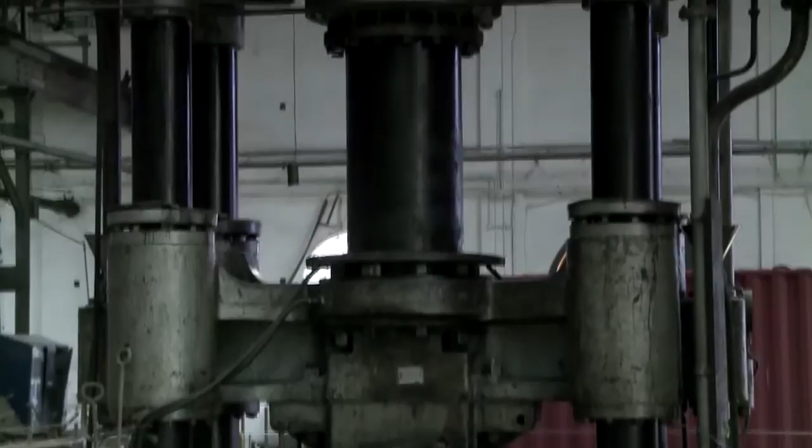In this workshop particularly, we have a machine nearby called the Davy Press. It used to have 2 steam locomotive boilers to service and raise steam to drive the huge 1,500 tonne Davy Press. When we cut off billets of steel, we'll pan in on some of the ingots a little later.

In this section we have an overhead crane because we're limited to 5 tonnes weight for the billet or ingot of steel we can lift. It would take maybe up to 4 to 5 hours to heat this billet of steel up to bring it out to forging temperature.

The forger was a highly paid man because that piece of steel, maybe in today's value $5,000 or $6,000, that ingot of steel - if the furnaceman or the forger overheat it, you've destroyed the piece of steel, straight away it's ruined.

You had to have a team of about 6 people. There was an overhead crane in this section, and a chap by the name of Ted Bocott used to be the driver of the crane in the 1950s, 1960s era.

The forgers were Bill Lawrence and Harry Lawrence. They were quite characters to watch on the floor. It was like running a circus show, and you had to get a giggle out of it. But where the forger spoke, everyone jumped to attention. If the job was hot, he'd say, 'righto, off your backsides, let's get out of the job.'

So then you would have to affix a thing called a porter bar to manipulate the piece of steel that you're going to put under the press. The forging range may be 1300 degrees centigrade, which is yellow-white temperature. Mild steel melts about 1400 degrees centigrade, just above that temperature line. But you may have been forging different types of steel.

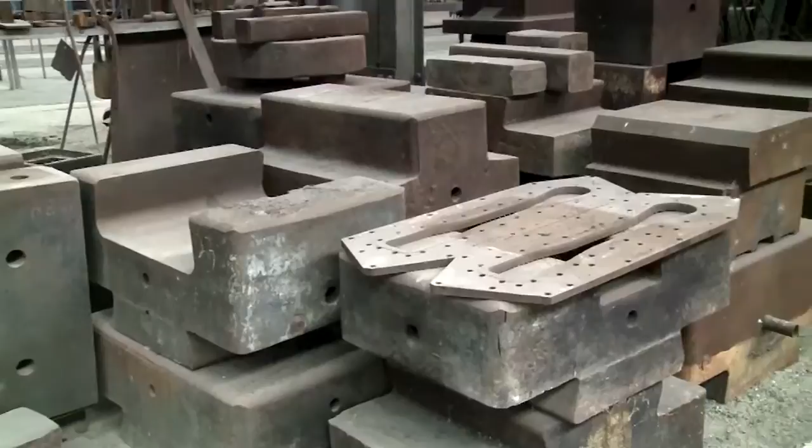The Davy Press is just to the rear of us, but to use a Davy Press you have to have heavy die blocks. We can see numerous die blocks sitting here. They're very costly because they have special steels in them - molybdenum, chromium and nickel - because when you forge a piece of material, it has to be harder than what you're forging.

So there are numerous die blocks here. I dare say a pair of die blocks, you're probably looking at in the order these days of $10,000 for a set of die blocks. They do fit into the press itself. Well, now we've just moved away from the die blocks to all the tools that we used to use underneath the Davy Press.

Although they look all weird and wonderful, colourful in their shape, each served a purpose. We can see laying on the ground a hook, a simple, very small draw hook off a locomotive, a typical thing forged at this machine. But all the tools were very, very heavy.

I was only about a 20-year-old apprentice when I had to work here for about six weeks in the late 1950s, and just to pick one of these tools up, the weight was enormous. There's spanners laying around the workshop that I think weigh over 20 kilograms just for one. So it was a lot of brawn and hard work. The forgers generally were pretty big, pretty strong people to do the work they had to do.

As I said earlier, we're standing near the table and chairs where the men used to sit and wait, and the crane man, till the job was hot. The furnaceman would yell out that we're up to temperature, and then the crane driver would remove the item from the furnace and go underneath the die blocks at the press. The work was very heavy and very hot, but we survived it.

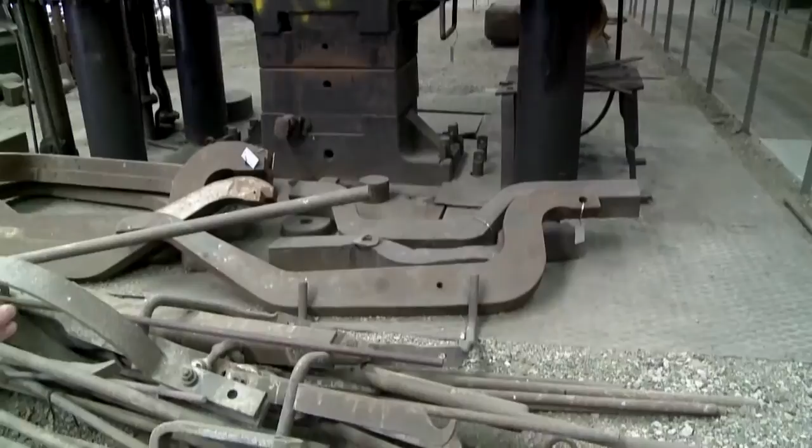We're standing near the Davy Press itself, and on the ground in the foreground we see a few different items. At the base of the machine there are some funny twisted shaped pieces of steel - equalising beams off mainline diesel locomotives. If you can visualise where that curls around here, there's a wheel in there, and another wheel there. Those two go together.

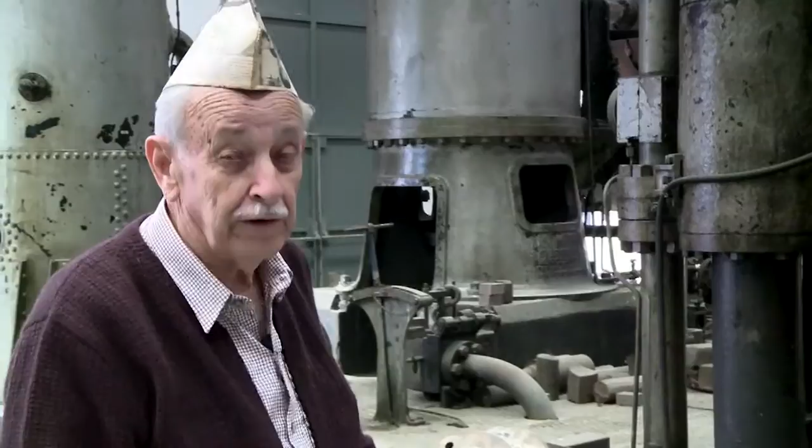The finished items are probably very, very valuable - maybe $12,000 each. You look at a piece of steel and it just looks like a humble piece of material, but in real value, it is very, very valuable.

Also in the area we have some of the porter bars which we use for manipulating our materials underneath the Davy press. I mentioned earlier, you heat the material up and you've got a forging range. All materials have a forging range, and if you go beneath it you can start to destroy the grain structure of the material. So there's a lot to it, a lot to do with metallurgy.

I did mention this building earlier - maybe we could show the twin cast iron columns which hold the roof up. They're made of cast iron, basically 4.5% carbon content. The major framework in the roof is wrought iron, which is nearly pure iron, maybe only 0.03% carbon. The die blocks still have a bit of carbon in them, but we also use fancy materials like cobalt, chromium or nickel that stand up to heat, and a lot of pressure. Remember, the press squeezes, so if you had rubber steel there it'd be completely distorted. We want something to retain its shape even under heat and extreme pressure.

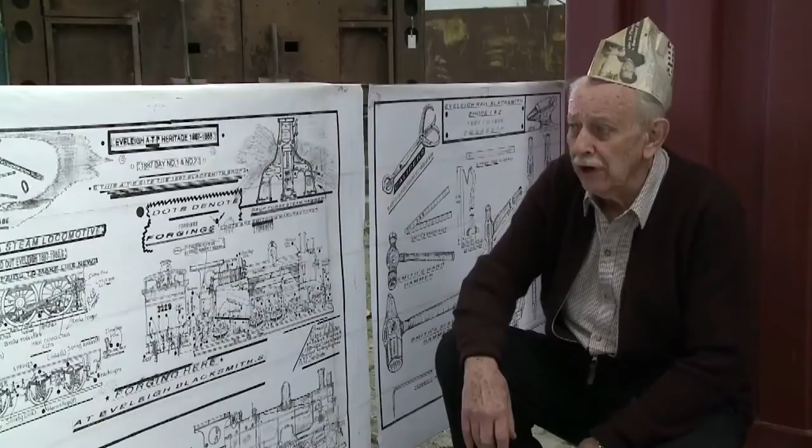I've done some drawings over a period of time since I've been helping out as a tour guide here with the Australian Technology Park. We see here basically the format of a steam locomotive. What it simply means - 32 was a 32 class locomotive, and they built a fair few here at Eveleigh. 29 happens to be the 29th one built.

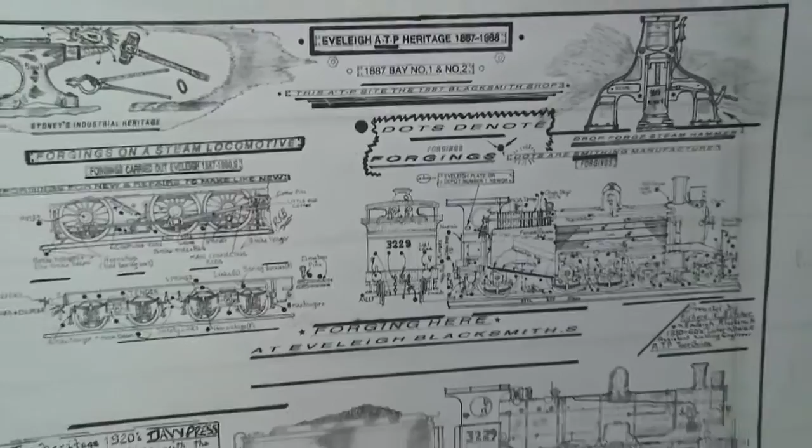Being a blacksmith and forge shop, these little black dots indicate what blacksmiths used to forge up there - the draw gear, the hooks and the chains, things for the grate of a locomotive, the eccentric arms, the connecting rods which are in the lower drawing. We did use the Davy press for a lot of this work.

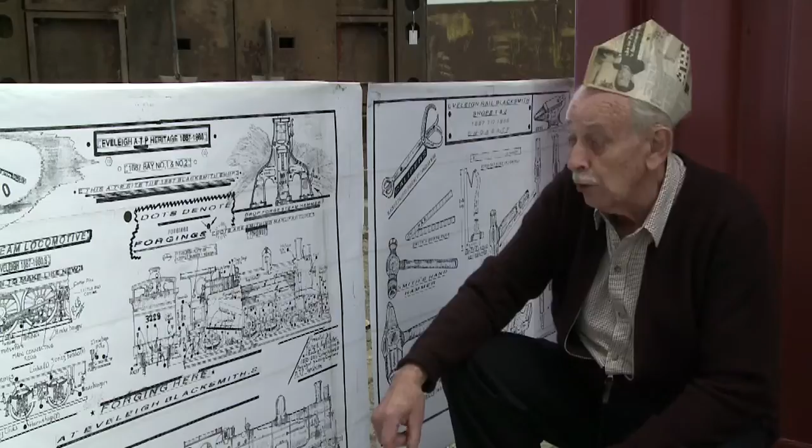There were also steam hammers in this workshop when I worked here. Also at the other end of this workshop we have a heavier forging press, and that came from the very first workshop here, which went back to the Cleveland paddocks. In the early days, of course, Redfern Station was called Eveleigh Railway Station, but Eveleigh, as was stated before, was a big employer.

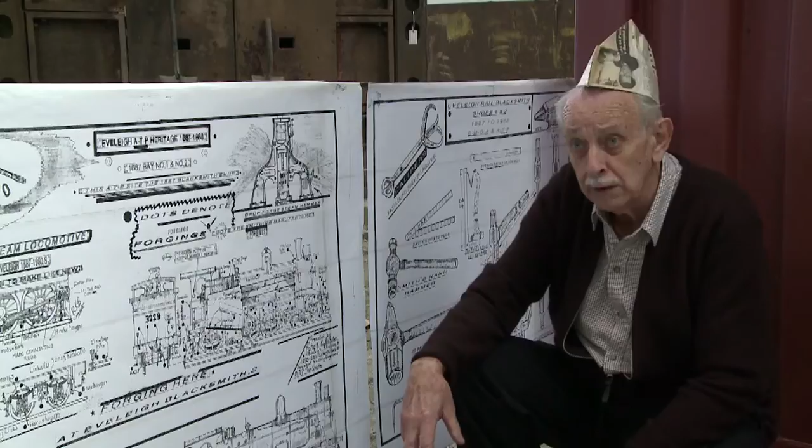I have read at one stage it got well over 7,000 people worked here, a big organisation, so close to the city of Sydney too. I did some sketches with little dots to indicate what was forged, and we had to keep 1,200 locomotives steaming on the rails. We did a little bit of carriage work here, although carriage works is on the opposite side of the tracks at Eveleigh, but brand new locomotives were also constructed on the site.

We're still in Bay 1 where the Davy press is. The blacksmith shops traditionally, you couldn't work on tarred surfaces because you're always forging hot material. If you lay the hot forging on a tarred surface, it's going to catch fire. You certainly couldn't have wood because you'd burn the building down. Cement, if you lay something hot on it, literally explodes - it fragments and blows up. So the floors in these workshops were basically dirt floors, very fundamental floors.

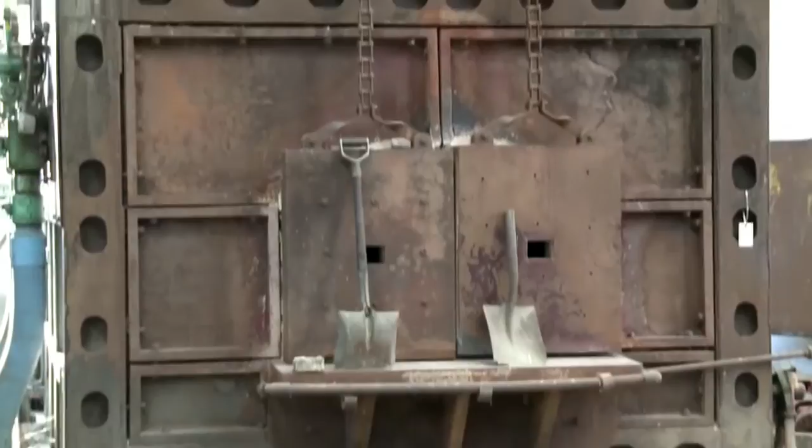In the background we have a furnace. Years later, furnaces were installed for heating up our larger pieces of material. Most of the furnaces were oil fired, but oil is carbonaceous and cooks more carbon into the material, which is very critical for what we forge. So it was good in one way and bad in another. Natural gas would have been better, but the workshops opened in 1887 and closed in 1988. If natural gas had been available, it would have been more inert to heat a piece of steel, but oil firing would impregnate additional carbon into the material.

We've now moved into Bay 2, which is principally there for the blacksmithing trade. In one section we had the toolsmiths, where they forged specialised tools, lathe tools, milling machine tools, and this type of thing. And we had more of the traditional repair work going on here.

I think there's only about 4 steam hammers in here today, but when I worked here there must have been maybe 12. A steam hammer is a very, very fast machine - very dangerous. It takes 2 years to train a young person or an older person how to operate one, because the piston goes up and down all the time, very quickly. If you blink, you could lose your life. They're very dangerous machines.

I only ever saw one person hurt when I worked here - he ended up 3 weeks in Missenden Road Hospital when tongs came off the job. We'll pan in a little while later and have a look at some of the tongs we used to manipulate our work with. There were around 56 men who worked here, predominantly blacksmiths, along with the blacksmith strikers.

Being a steam workshop, we were just having a look at the steam hammer. When the shop was activated in the morning, there were 4 big boilers on the outside. If we look skyward, we see a pipe with an expansion joint in it. When the chap would open up the main control valves in the morning, the whole workshop would kind of become alive. The air in here was smoky - sunlight used to filter through, and in it there were little sparkling, glistening pieces of coke and coal floating around. I'm still alive, so it never hurt me, but that was the way, and the aroma was beautiful from the burning coal. It was a very interesting place to work.

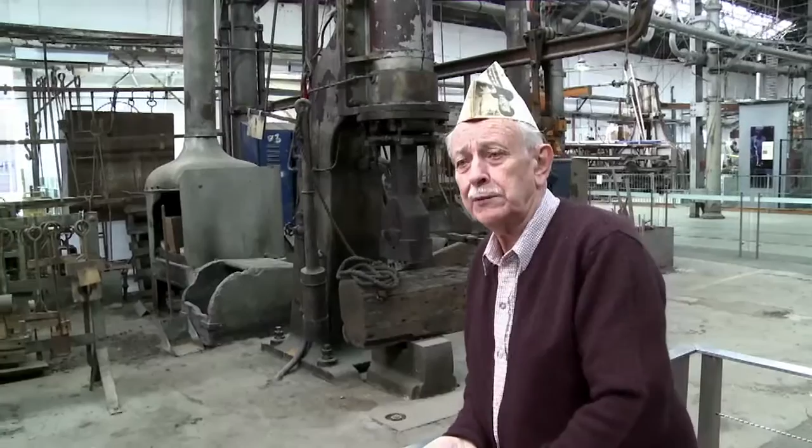We're still inside the blacksmith shop, and we see anvils - an essential item used in the blacksmith shop. The ones here are very heavy, 500 and 600 weight. 100 weight is 112 pounds, so I don't know what that is in kilos, but it'd be very expensive to buy one today. They're getting very, very rare.

And we also see the forge fire, which has a chimney that goes through to the roof outside. The basic fuel we used was coke. We'd light the fire up of a morning using a bit of kindling wood, or maybe some kerosene with a few pieces of timber covered in kerosene to light the fire. Then we'd bring the fire up to temperature, and then go on to coke.

You can't use coal like coke, because coal has carbon in it, so you'd cook carbon into the matrix or base material you're working with. Coke gives a good, fine burn. It's very old material, but it gives a very good burn. The coke bin is that little square box on this side of the fire, that's where the coke used to be. The best size, what we called peanut size, was used for our heating.

A lot of forge fire welding went on here. There's fires just here - I used to do a lot of forging and fire welding. Fire welding is nearly a lost art now, and I reflect an older age - I just can't believe what we used to do. You had tools to pat the fire down. It's slack coal, very fine coal, and you'd build it up more or less into castles and pat it down.

Coincidentally, where this steam hammer is sitting, there's a thing called a ram hanging there. The ram is what we used for shortening materials - a connecting rod on a locomotive, the big rods which go around the outside.

The fitting machine shop from down Bay 8 or 9 would come up and say we have to have a rod shortened an eighth or three-eighths of an inch. We'd build a special small forge fire, heat the material up, and put trammel marks on it for the precise size we wanted. Then, using that ram hanging down there, or the rope, you'd get three or four men to pull the ram back - it weighed about 50 or 60 kilograms - and bang, hit the job. You had to be pretty accurate because someone could get hurt. That was part of our work, lengthening or shortening connecting rods or coupling rods on locomotives, and other items on steam locomotives.

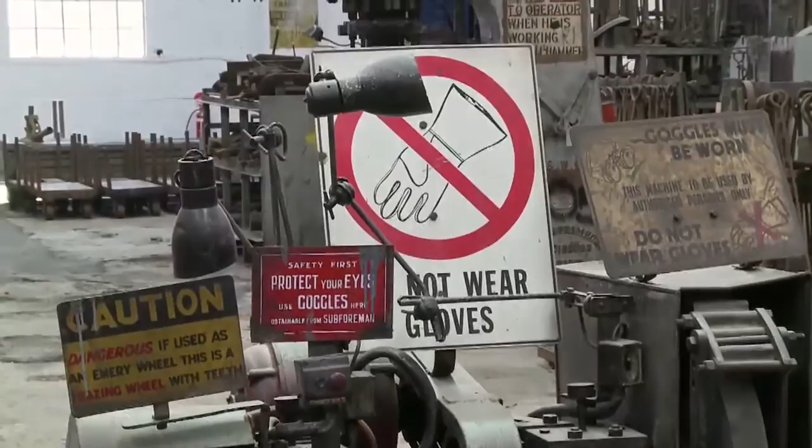We see a machine here - this is a bit unusual, and I know these are very dangerous machines. This is called a frazing wheel, it's got little teeth on it. So when we forge something in the fire, you get a fin - that's the overburden material you don't want, from forging between the dies. We'd heat it up, run out here, put it under this, and grind it off.

The only catch was the little pieces of metal that got ground off - when they hit the body, they'd kind of burn holes in you. So when you finished grinding, you'd go back with blood pouring down your arms. That was very typical. On the other end of this is the grinding wheel, a decent sized one too - about 6 inch diameter, 2 inches wide.

The railways would manufacture a lot of their own equipment - this machine could have been one of hundreds made at the workshops. They used to manufacture their own vices, small lathes, sometimes milling machines, all different types of apparatus. They had the capacity for doing anything. The railways was a big organisation.

In the 1955 era, they employed 56,000 men and women, with every tradesman you could think of - angle iron smiths, blacksmiths, forgers, boiler makers, boiler makers' helpers, blacksmiths' strikers, fitter machinists, tool makers, tool smiths, painters, and car and wagon builders. They had the works - it was a big institution, the old railways.

You may notice I'm wearing a paper hat. I didn't really wear one when I worked here, but a lot of the workers did, because the newspapers came out every day - if you had a small head, you'd use the Daily Mirror, the Telegraph, or the Sydney Truth, but if you had a big swell head, you'd use the Sydney Morning Herald, because they were a larger format newspaper.

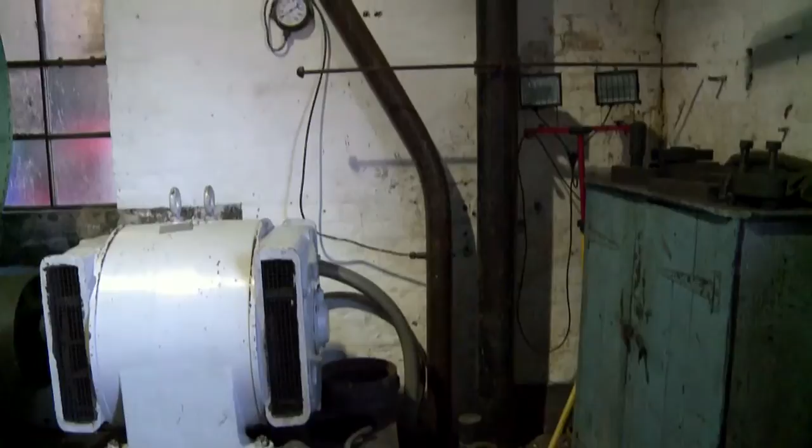So if we have a look at the process here in the pump house, on my left at the wall you can see two major pipes. The one on the left is the supply steam pipe from the steam boilers next door that we just saw, and you can notice there on the wall there's a steam pressure gauge to give us some idea as to what the incoming pressure was.

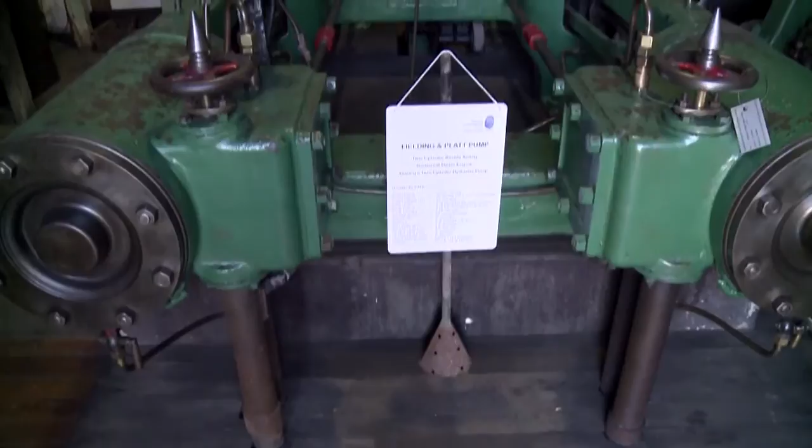And the steam engine is here in front of me, and the supply steam came from the wall under the floor to the cylinders of the steam engine, of which I'm standing beside one. The other pipe on the wall was for the exhaust steam, such that once the work of the steam engine had been done, the waste steam was exhausted to the air.

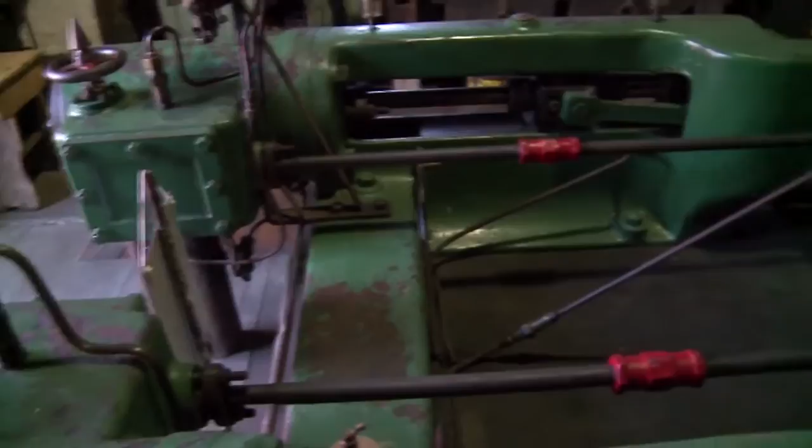The steam entered the cylinder here in front of me, and that pushed the piston backwards, and at the other end of the machine there are pumps that took supply water, and the pumps pumped the supply water out to the accumulators, which are outside this building.

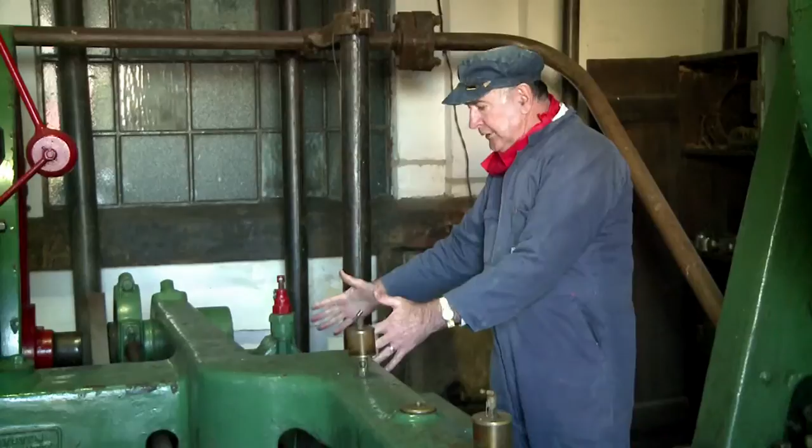This is a twin cylinder steam pump, or steam engine and pump system, and you can see the large flywheel at the back there, which maintained the motion of the engine whilst it was running. At the pump end here we've got a cylinder with a piston inside it, and the piston has the same stroke as the steam piston, but it takes water and forces the water through these large pipes, the one there at the back of the building.

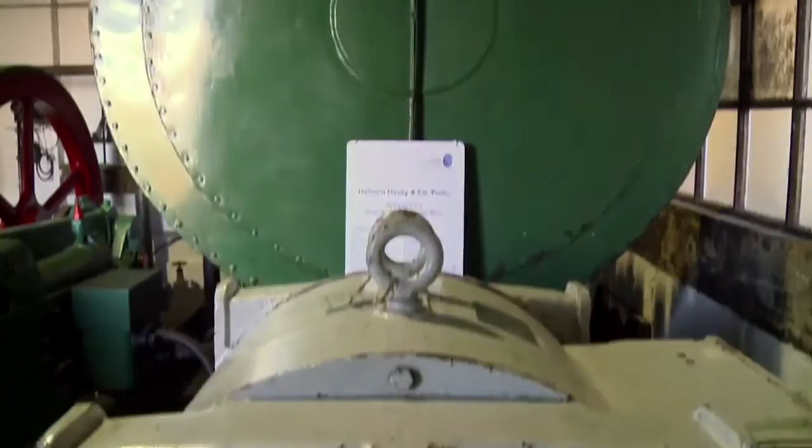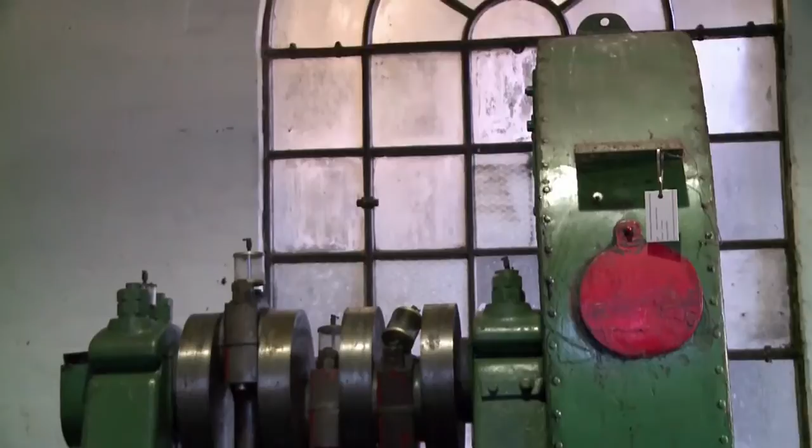The older Fielding pump was replaced by the Hathorn pump here on my left. If you look to the front, you can see the electric motor that drove the Hathorn pump. That electric motor is some 75 horsepower. It provided rotational motion which came through these gears that are covered up by this shield, and the rotary motion was then transmitted into the pistons of the pump that are here on my left.

The Fielding steam engine is a twin cylinder steam engine, and when it was replaced with the Hathorn pump here on my left, it was replaced with a 3-cylinder pump system, but running at slightly higher speeds.

This system typically supplied high pressure water at something like 600 pounds per square inch, and if we compare that with the pressure in the tyres of our motor car, which are about 30 pounds per square inch, you can see that there's quite a considerable gain in pressure, and therefore a gain in energy that is stored in the system.

The Fielding pump and the Hathorn pump both did the same sort of work. The 1886 Fielding pump was, as I said before, replaced in 1914 with the Hathorn pump, but thankfully this engine was stored, held for supplementary operation in case of breakdown of the Hathorn. It was here as a backup piece of equipment.

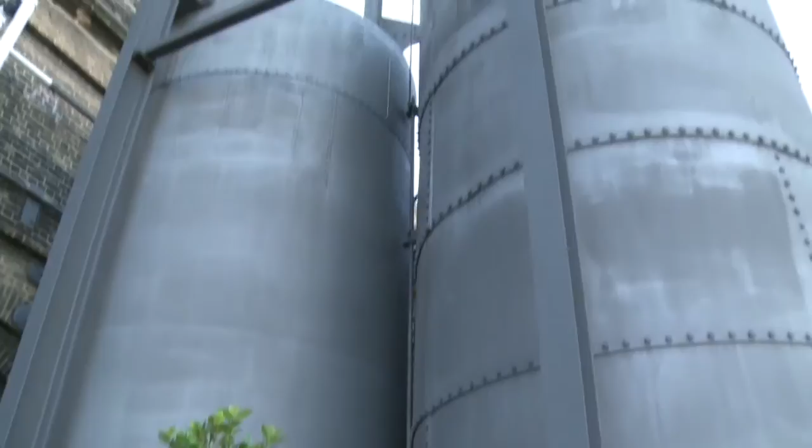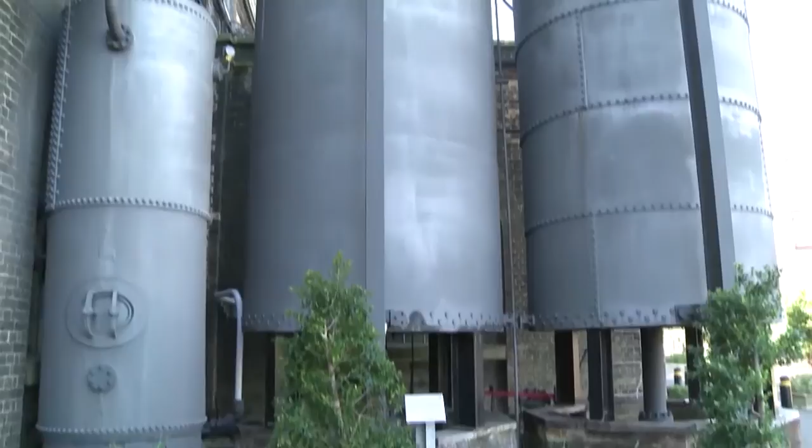That's done by virtue of the accumulators, which in this particular powerhouse are located outside. Within the little pump house, water is fed into the pumps, and the pumps pump the water through to the devices behind me called accumulators. We've got two accumulators here, and they raise the water supply pressure through to 600 pounds per square inch. And then that high pressure water is reticulated to machinery in the factory.

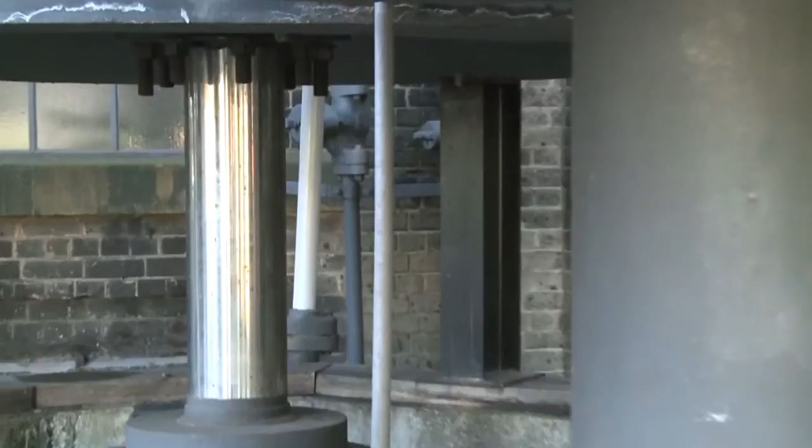So how does an accumulator work? Well, you might like to think of this as a large can with a piston at the bottom, and the feed from the pumps comes into the bottom of the accumulator into a cylinder that has the piston sitting in it. Now the piston is rather small.

Here at Eveleigh, the piston size is around about 10 inches diameter, and in the can, or canister, or drums that you can see here, there are heavy weights, and the water being pumped into the system by the pumps has to work against those weights. In actual fact, the total weight here on each of these accumulators is 80 tonnes. So we've got 80 tonnes of mass sitting on a 10-inch piston.

So the pumps are continually supplying water into this system. The pumps have to create enough energy to pump water into the accumulators, and as the accumulators operate, they will rise and fall. So as the pumps operate and there's no output to the factory, the pumps will actually force the accumulators to rise.

You can see that the two accumulators here have guide rails, and you need to also remove the stabilising beams underneath the accumulators, because they're not part of the original system. They're there simply to maintain these accumulators in a safe position.